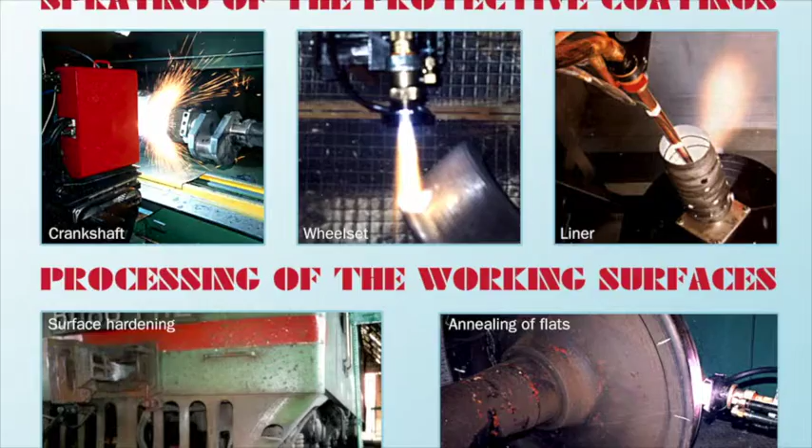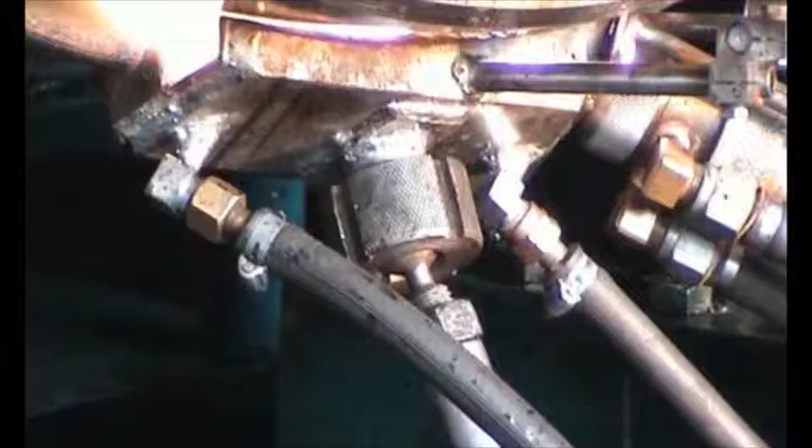Our company brings together leading experts in the field of plasma technology and gas thermal processing of metals. Since 1996, we have actively participated in solving the complex of rail wheel problems on Ukrainian railways. We have carried out long-term successful tests of heat-treated wheels with the participation of leading specialized institutes of Ukraine.

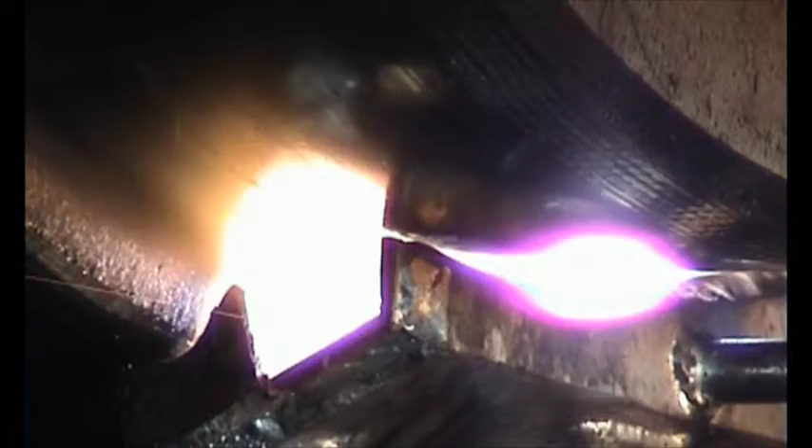Our equipment for plasma hardening of solid-rolled and bandaged railway wheels is widely used on the railways of Ukraine, Moldova, and the Baltic states. The problem of wheel and rail joint operation, their reliability and life duration, is of current interest for all railways in the world.

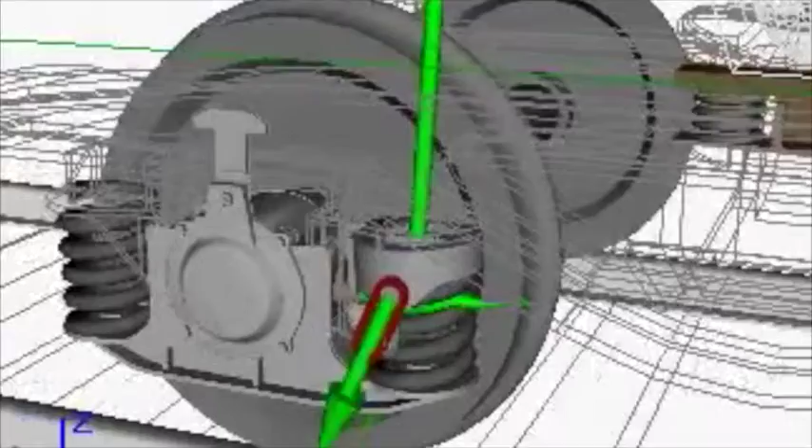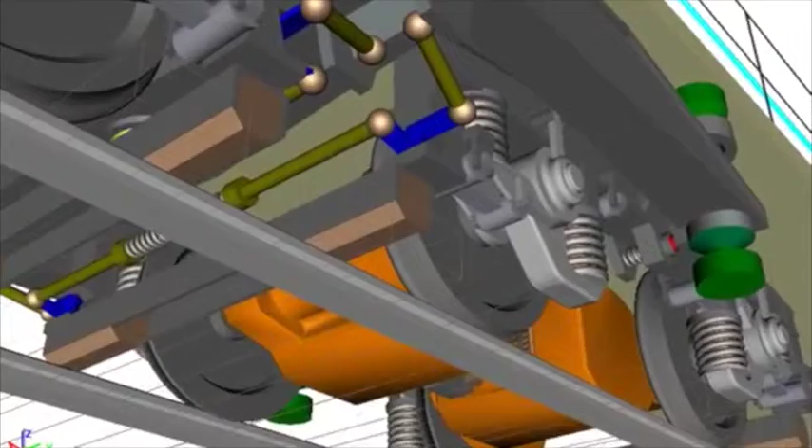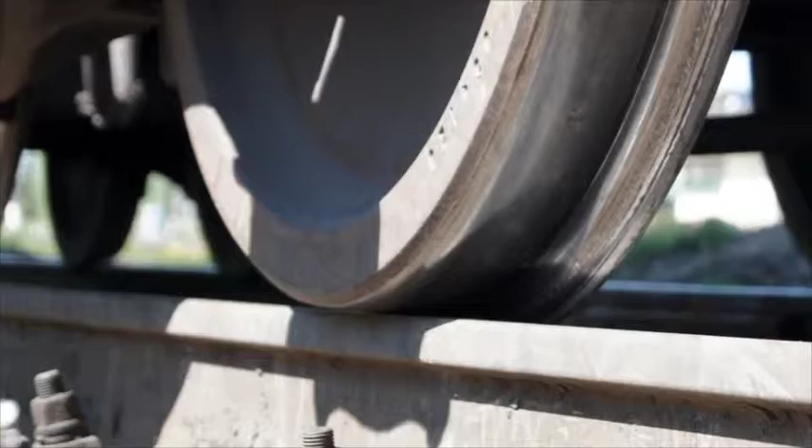Wheels and rails must withstand the specified level of load and force impact arising from interaction between them while preserving long durability. Even today, the standard wheel resource does not meet increased operating requirements. The current trend of increasing train speed and increased loads leads to growth of tension in the contact of wheels and rails. This inevitably is accompanied by significant wear of contacting surfaces, which is a major cause of premature replacement of wheels and rails.

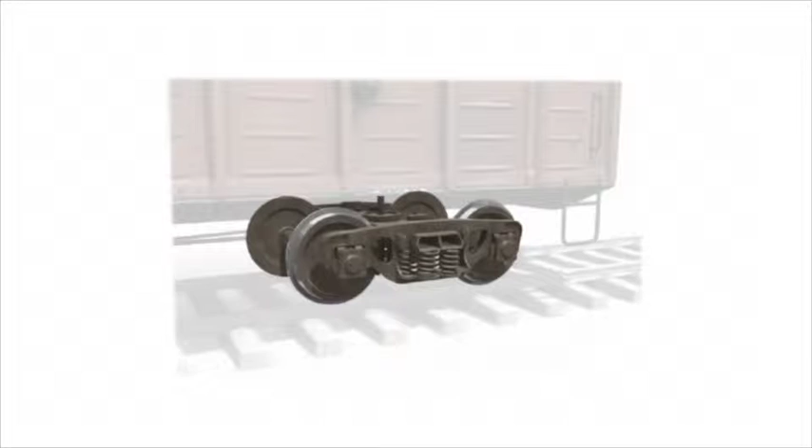Long-term analysis of the wheels and track on the railways of Ukraine shows that during operation, the rolling surface hardness of the wheel and surface hardness of the non-heat-treated rail increases from 270 to 400 Brinell to a depth of 5 mm. This occurs as a result of cold hammering of metal surface layers.

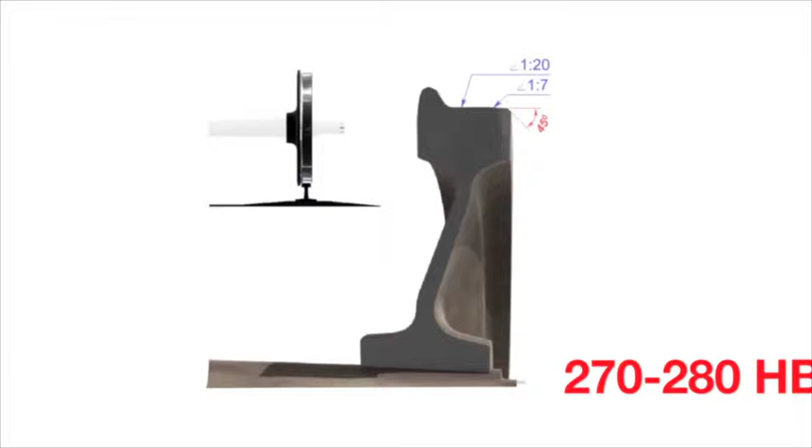At the same time, the surface hardness of the wheel flange and lateral portion of the non-tempered rail remains unchanged, at 270 to 280 Brinell. That is why, in the contact area of the wheel flange and lateral working head of the rail, increased surface wear is observed. This carries the necessity for gradual machining of wheels and ultimately their premature replacement.

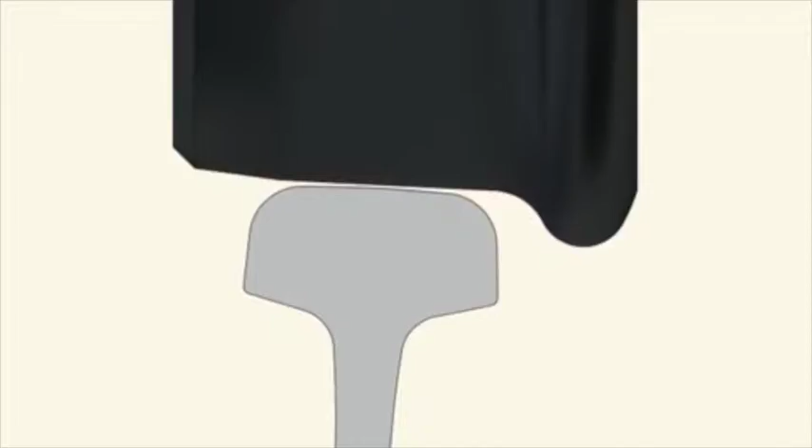Another important factor influencing wear is friction in the wheel and rail contact zone, which occurs under conditions of wheel sliding in curves. With high friction between the wheel flange and the lateral working face of the railhead, fuel consumption for hauling operations significantly increases, wear of wheel flanges increases, and in some cases there is danger of derailing of wagons.

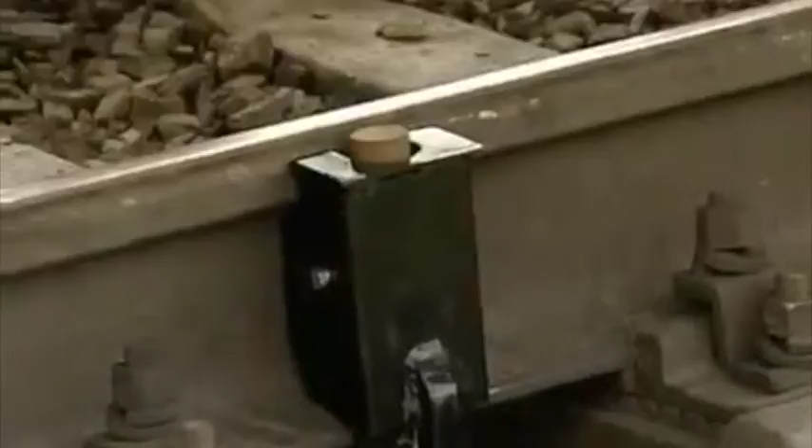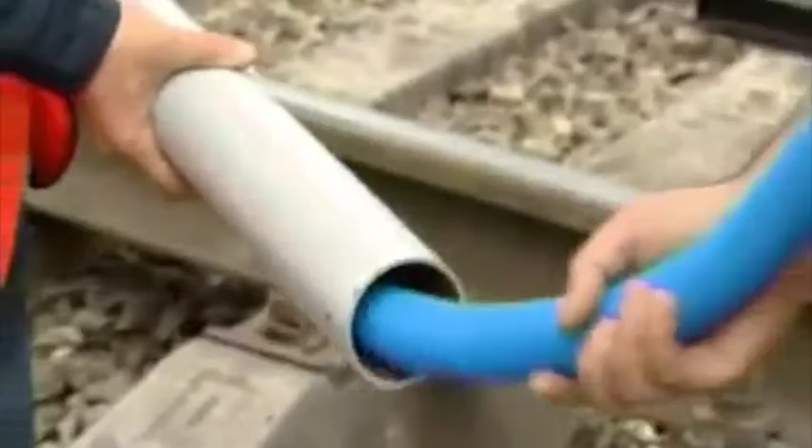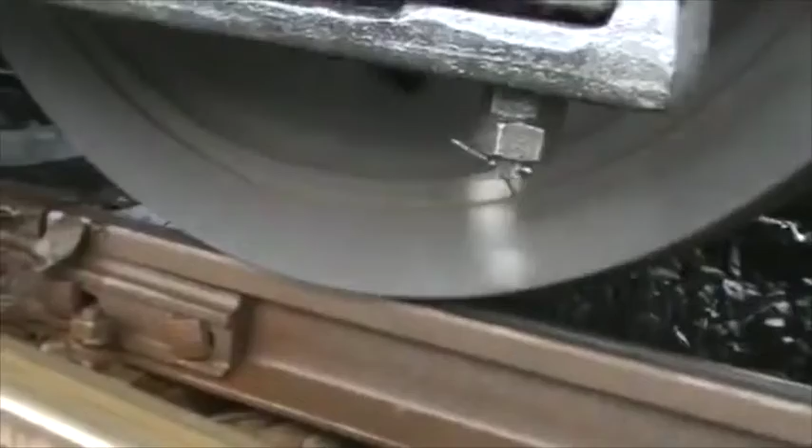The most common technique for decreasing the coefficient of friction is the use of traveling lubricant pumps. They are used for rail and wheel flange lubrication. However, they are extremely unreliable in operation and do not provide sufficient effect. This technology is particularly ineffective in conditions of rolling stock operation in the highlands.

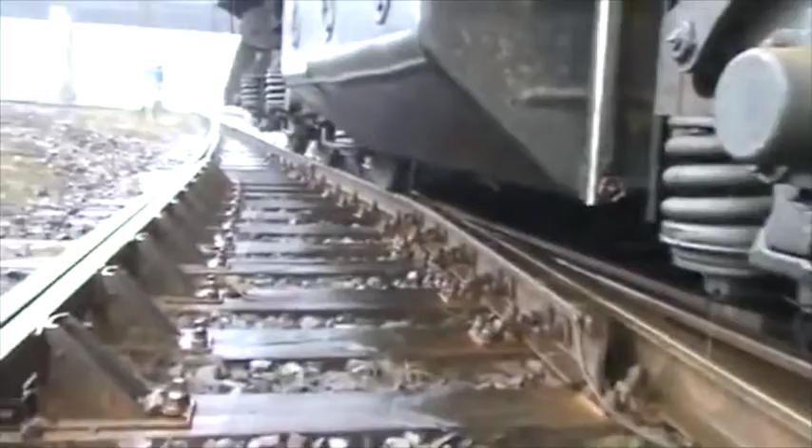Grease inevitably falls on the tread surface, which causes a slippage effect. To eliminate this effect uphill and downhill, it is required to pour sand on the rails, causing a natural converse effect: accelerated wear of rails and wheels.

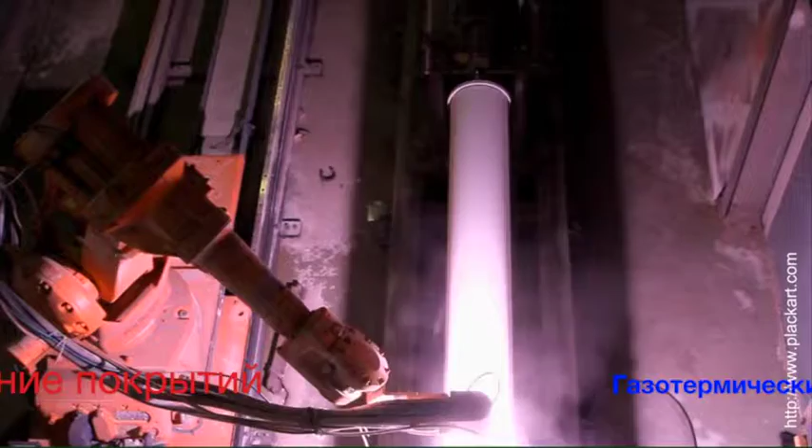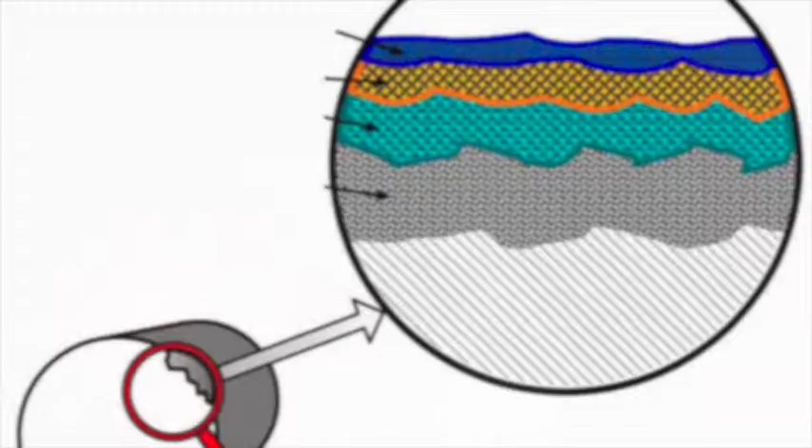As a means of solving the wheel-rail complex problem, attempts were undertaken to apply low-friction coatings on the lateral surface of the railhead by the gas thermal method. This solution had certain advantages, but insufficient mechanical strength of adhesion to the substrate causes the coating to strip off in a very short term. Therefore, this trend can be regarded as a dead end.

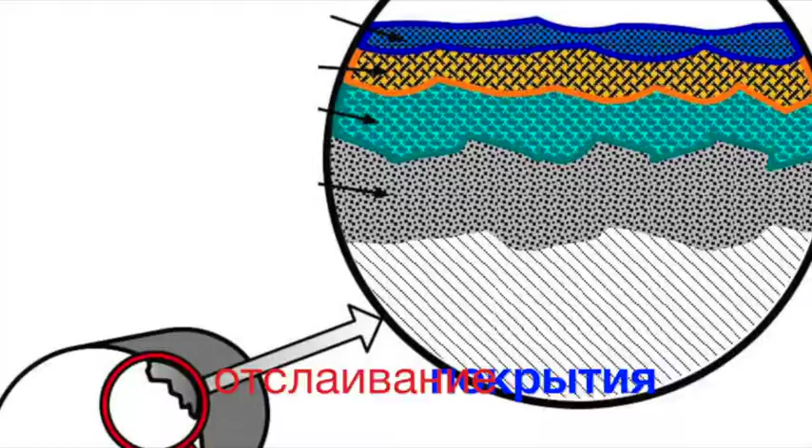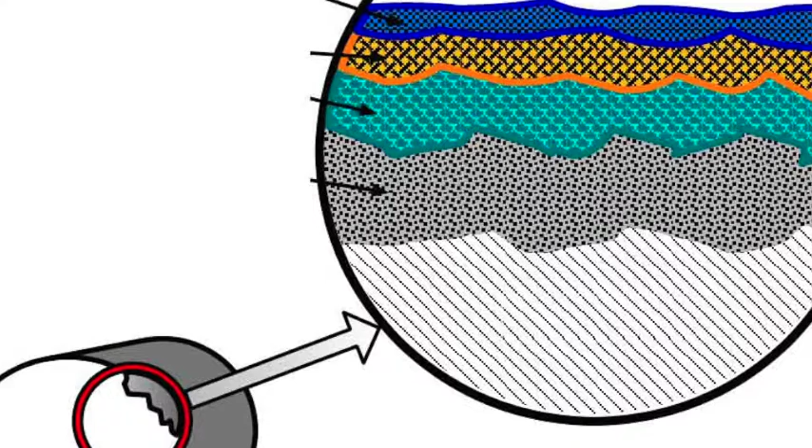As practice shows, the ideal solution of the wheel-rail complex problems can be obtained through increase of the surface hardness of the working areas of rails and wheels, selection of the optimal ratio of these values, and reduction of the coefficient of friction in the contact zone.

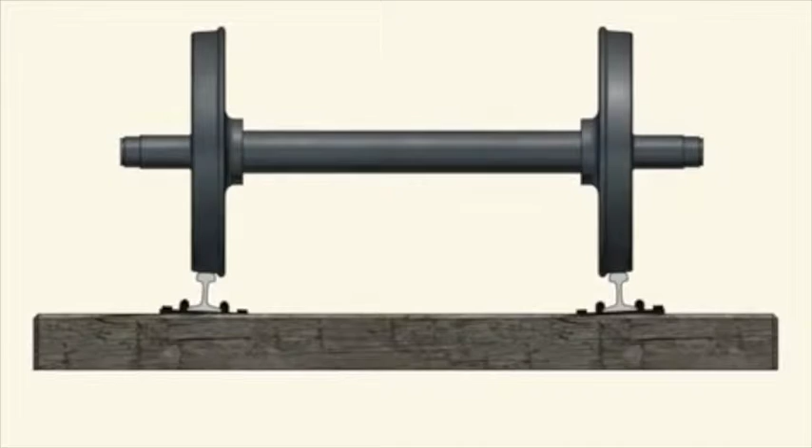We have essentially proved that hardening wheel flanges to a high hardness becomes an effective way of lateral wear control for both wheel flanges and rails. Similar conclusions were reached by Swedish and German experts.

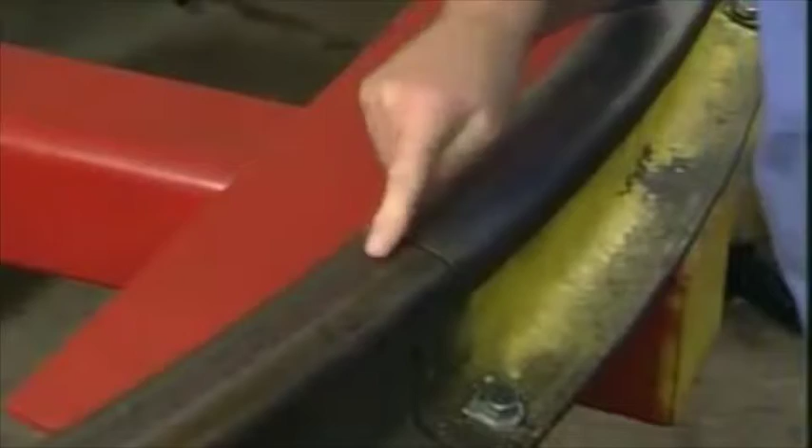They offer a solution which performs melting of the surface by laser and application of a 2 mm wide strip of cemented carbide alloy on it. It is expected that this technology slows down the wear of wheels by 4 times, while reducing wear of rails and the noise level.

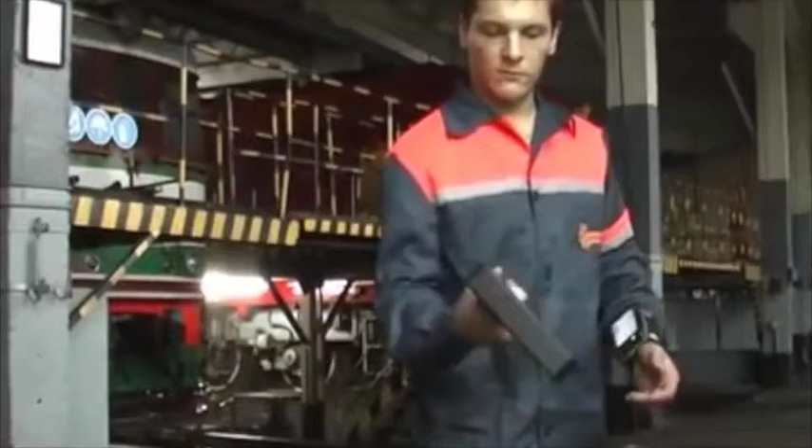These figures are questionable, given that the bandwidth of hardening strip is only 2 mm. In addition, this technology has a number of disadvantages: it is quite complicated in implementation and requires highly skilled personnel.

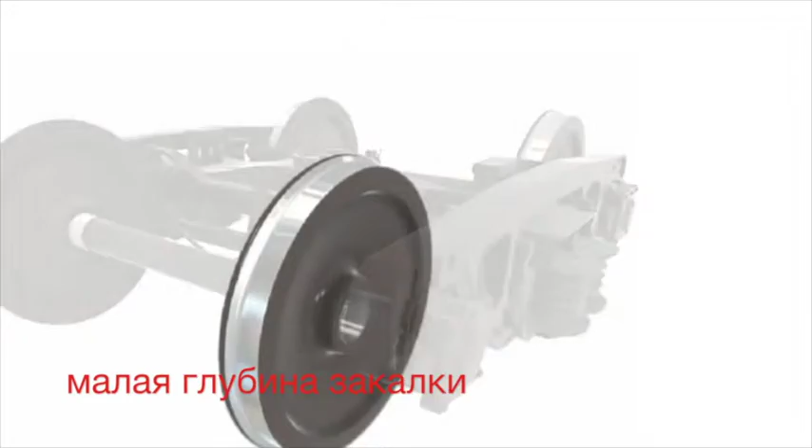The practice of using argon plasma hardening method, developed by Russian specialists as well as HFC in Poland, is also not widely used because of significant deficiencies, which include low depth of surface hardening, low productivity, and high probability of defect formation depending on environmental conditions.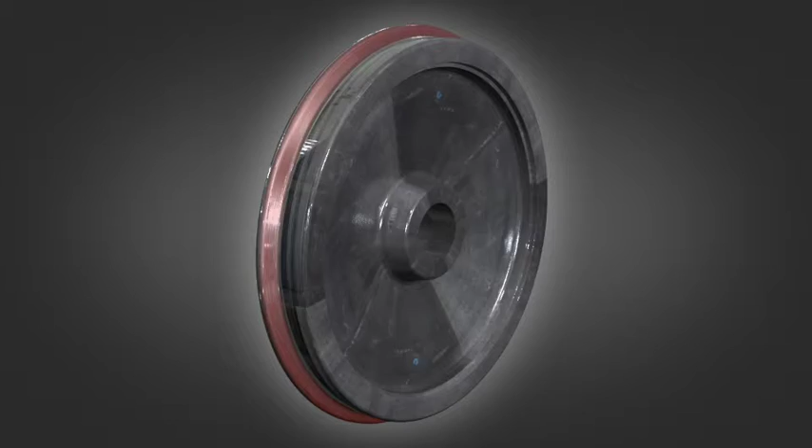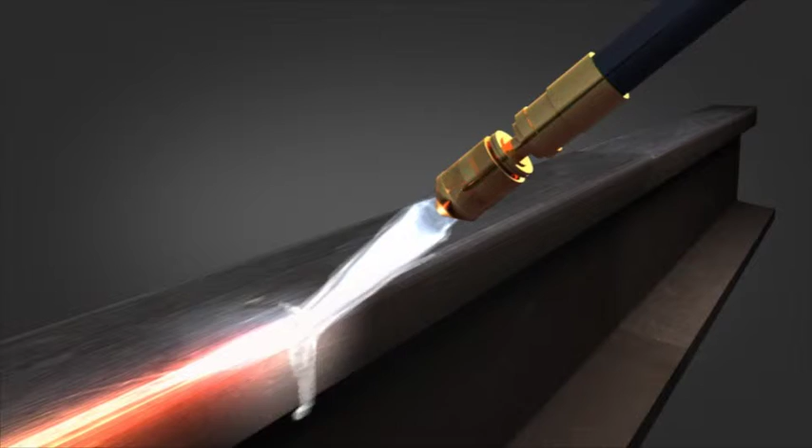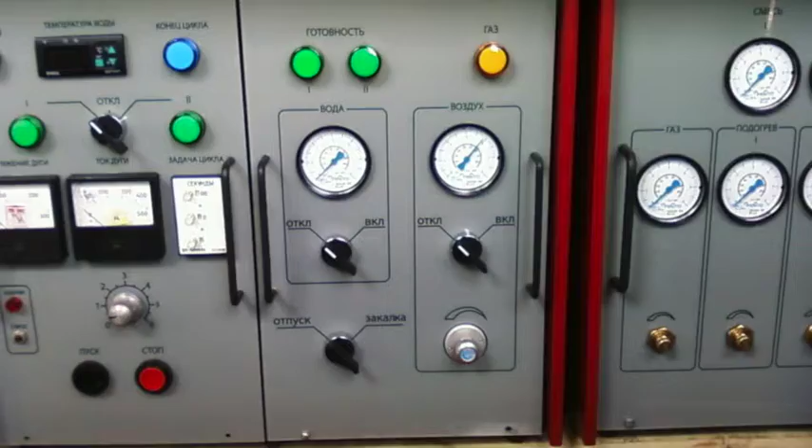The development we offer has a number of significant advantages and at the moment can be considered the most effective means of solving rail wheel complex problems for wheel flanges and the working part of the rail head surface. The unit includes: first, a source of energy; second, control equipment consisting of 3 units; third, a computer module; fourth, 2 forming modules with cable hose specs up to 8 meters long; fifth, an autonomous cooling unit.

The basic unit can be supplied without the computer module. On the basis of the unit, we developed a new technology of slide flat release on the rolling surface. Equipment and technology are patented in Ukraine, Russia, Kazakhstan, and China.

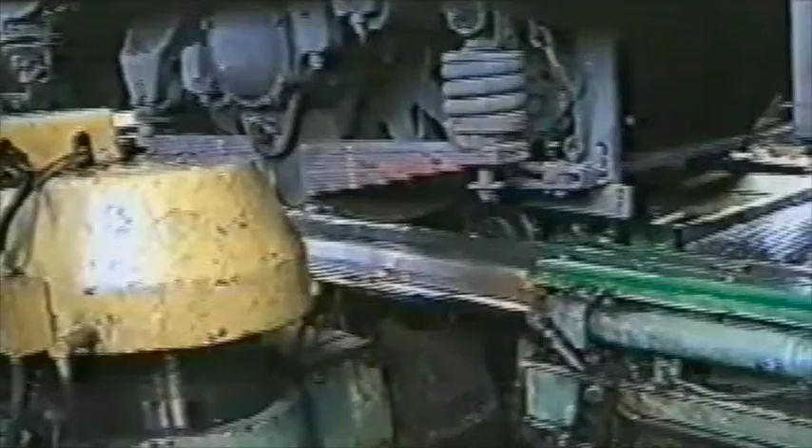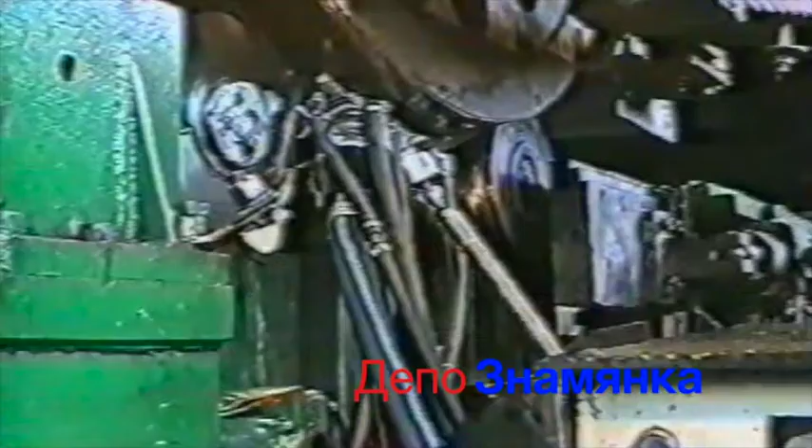After long-term run tests of hardened wheel pairs on the test railway routes of Dnipropetrovsk Institute of Transport Engineers, the first set of equipment was installed at the Znamyanka locomotive depot. Since 1996, the railroad depot carries out locomotive wheel flanges hardening directly under the locomotives.

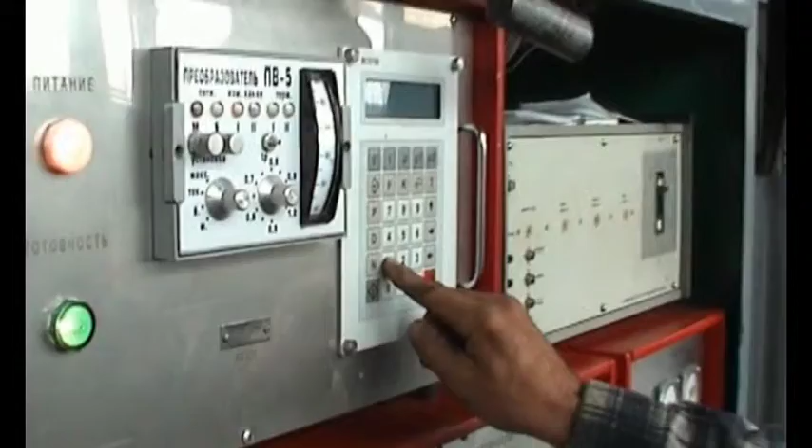In 1996, our equipment was installed in the locomotive depot Lviv Zahid as well. In 2000, a modified unit with computer module was installed in this depot. In locomotive depot Krasny Liman, the equipment was installed in 2012.

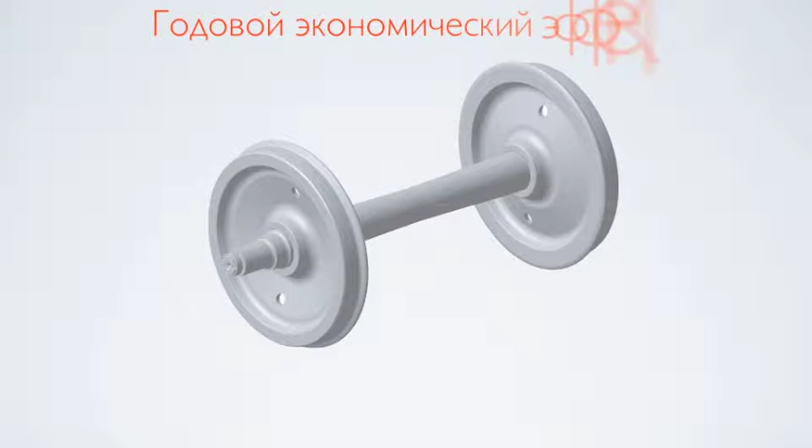Our solution has the following indisputable advantages: cost effectiveness. The cost price of one wheel hardening is only $23. In Ukraine, the annual economic effect is from $800,000 to $1.5 million per railroad depot.

High speed of the process: one wheel hardening takes only 5 minutes. Ease of operation: no need of highly skilled service personnel and no complex procedures.

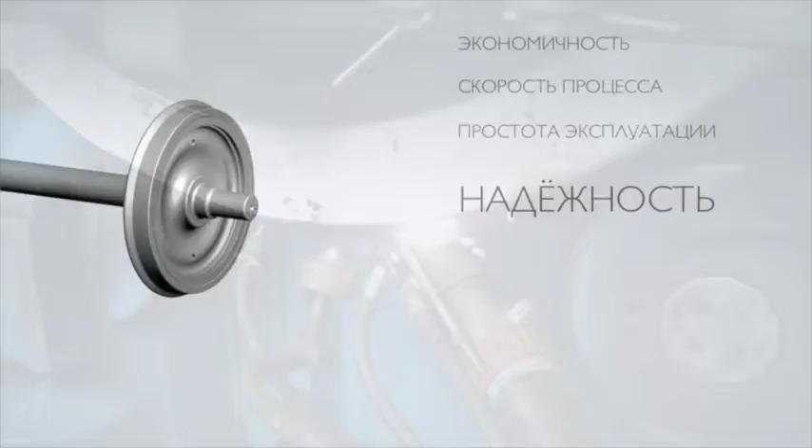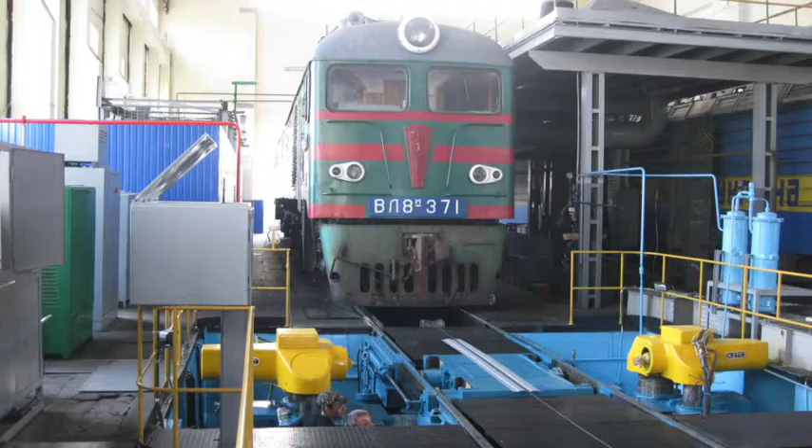High reliability of equipment, proved by long-term successful operation in Ukraine, Moldova, and the Baltic countries. Independence from environmental conditions: the equipment produces no defects even in open conditions at temperatures from -10 to +40 degrees Celsius. Process versatility.

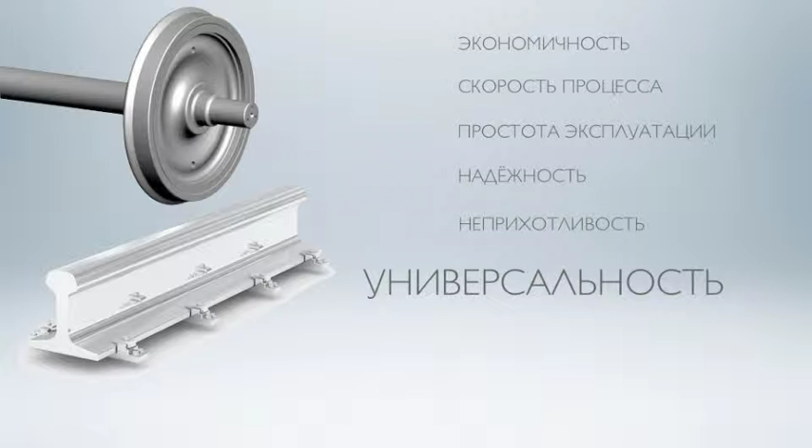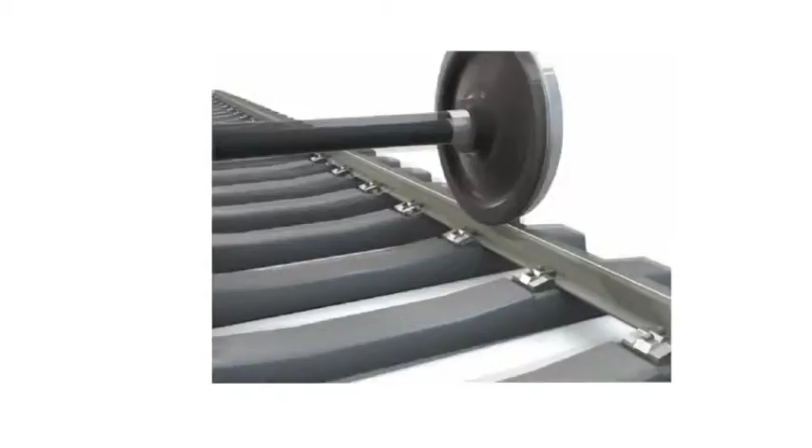The equipment can be used both for hardening of wheel flanges and for rail head hardening. Only our equipment is capable of carrying out hardening of the rail working head directly on the railways and in outdoor conditions. After wheel flange and working rail head hardening, the coefficient of friction reduces by 40%.

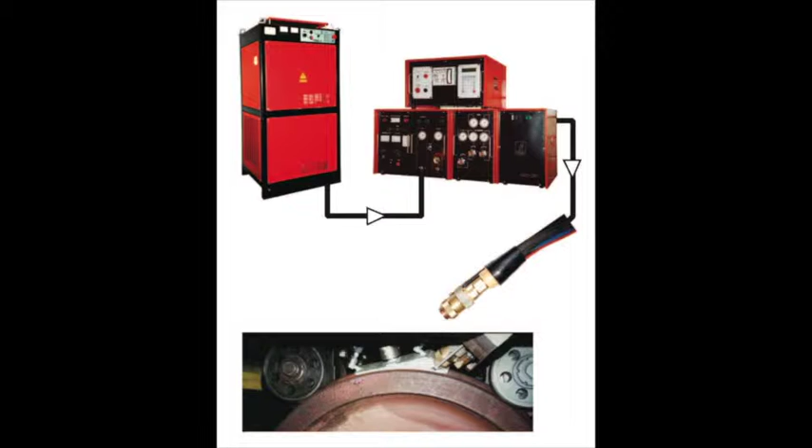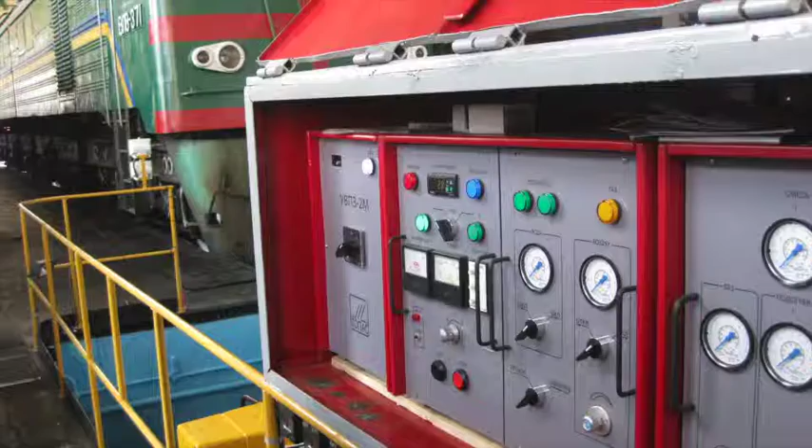Technologies and equipment offered by us are versatile, effective, and cost-effective solutions to rail wheel complex problems, have a number of advantages compared with other methods, and are of interest for all railways in the world.

At the moment, we have produced and installed more than 30 sets of equipment for wheel flange hardening. Hardening of locomotives, passenger and freight wagons, and suburban electric trains is carried out.

Unique experience of the formation of optimal hardening structures has been accumulated.

Our equipment and technology are certified in Ukraine, Moldova, and the Baltic countries, and provide high resistance to cracking in the range of surface hardness from 300 to 600 Brinell.

Only our equipment and technology ensure repeatability of the optimal structure of the wheel flange hardened zone across ambient temperature variation from -10 to +40 degrees Celsius.

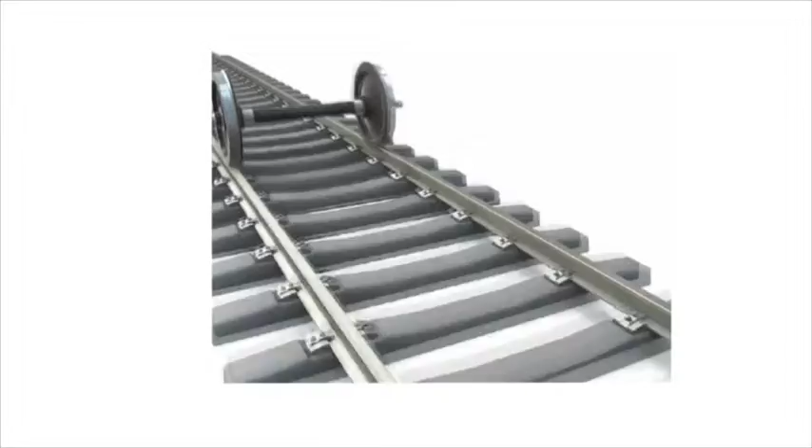Wear intensity of wheel flanges hardened with the use of our technology decreases by 2.5 to 3 times. Only our solution allows hardening of the working rail head in an outdoor environment and directly on the rail. Only our solution decreases the wheel-to-rail coefficient of friction by 40%.

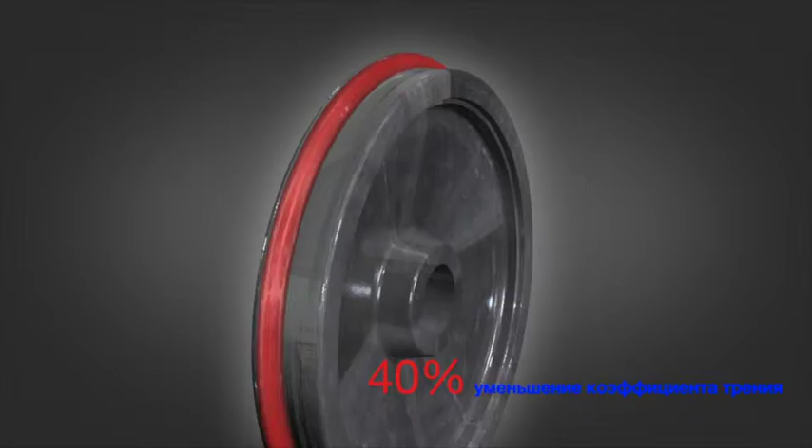Even today, we are ready to solve a number of issues in the rail-wheel complex through manufacture of universal equipment for hardening of wheel flange and working rail head.